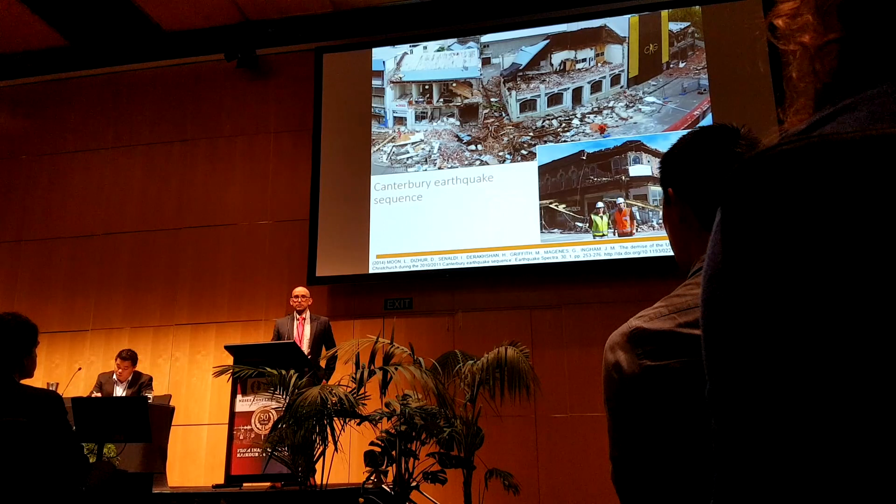My professional career took a completely different turn after the Canterbury earthquakes. This was one of the first flights after the airport reopened. I was in Christchurch for about a year, and along with Lisa Moon, we spent that time inspecting pretty much every single unreinforced masonry building in the Canterbury region—about 650 buildings in total. That data proved quite useful, ending up in Royal Commission publications, and we're still crunching through it.

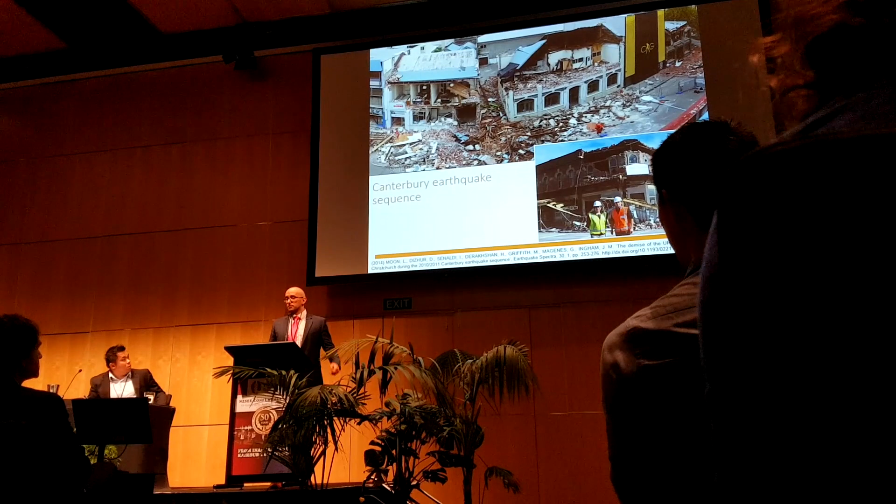Because I'll be flicking through the slides very quickly and mentioning things exceptionally fast, you'll see at the bottom of each slide a paper or report name that will refer you to more information. A lot of this has already been presented at different conferences and in papers, so this is essentially a summary put together into one presentation.

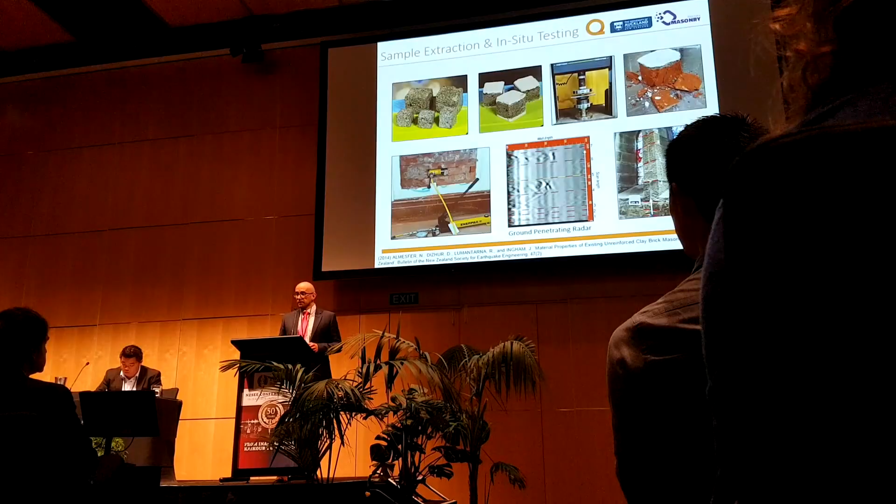We started the journey with small-scale things, looking at extraction of mortar samples to establish material properties for masonry buildings. Along with some peers at the university, we established a technique where we extract little samples from masonry buildings, compress them, and extrapolate to the global material properties of the building.

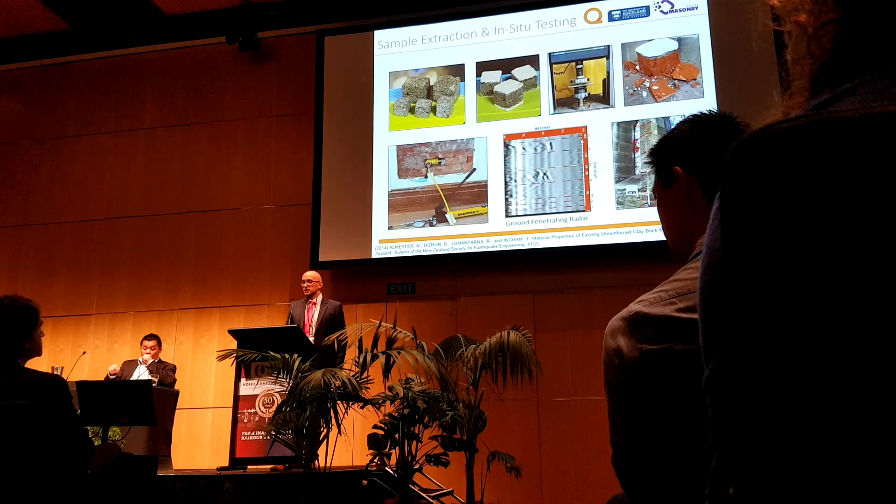We then modified various techniques from overseas to establish shear strength of buildings. We also used more advanced techniques, resorting to ground penetrating radar to establish voids within masonry buildings and interconnection, particularly for stone masonry buildings.

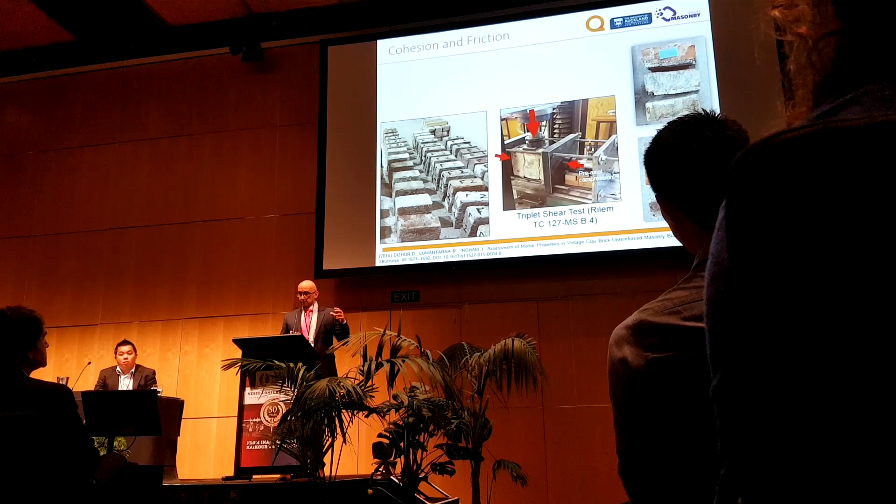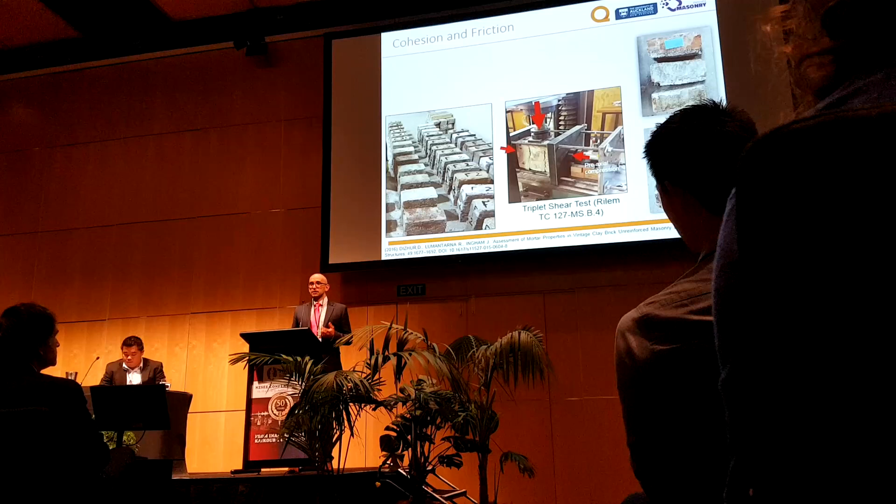We then moved to looking at assemblages, and established different coefficients of friction and cohesion for masonry with different mortar mixes and different aggregates for mortar mix. All of this ended up in the NZSEE section C8.

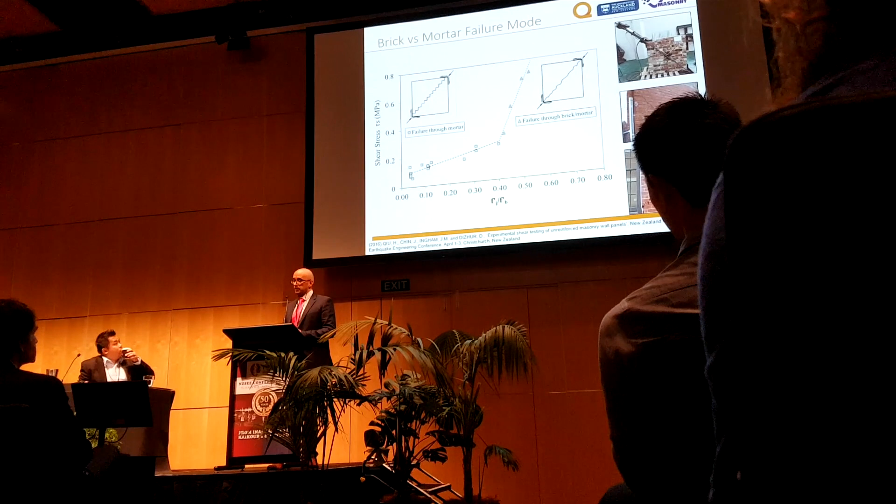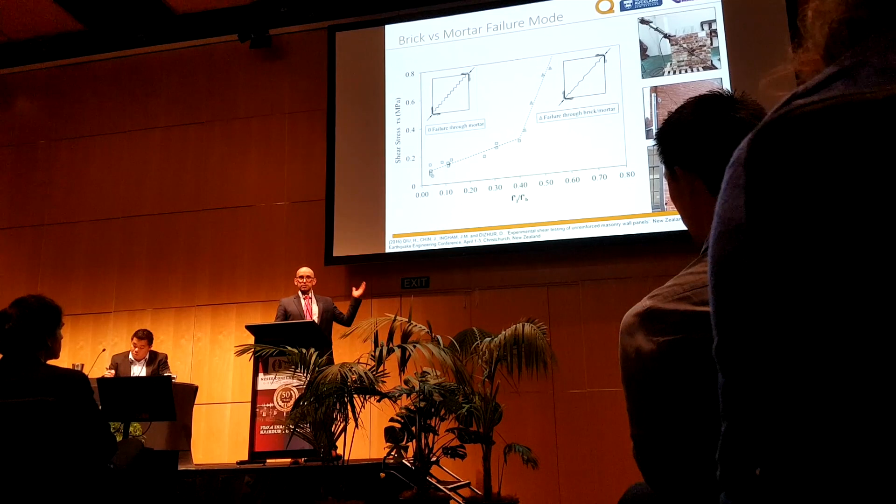What was done later was, again, one of the pioneering studies with material research: we looked at the transitioning point where the failure mode actually happens within the mortar joints, as seen in the picture on the left, versus a brittle failure that happens directly through the brick. We tested a number of relatively large walls using a variety of mortar mixes and brick strengths, and neatly established a transition point between the failure modes. That also ended up in the newly released section C8.

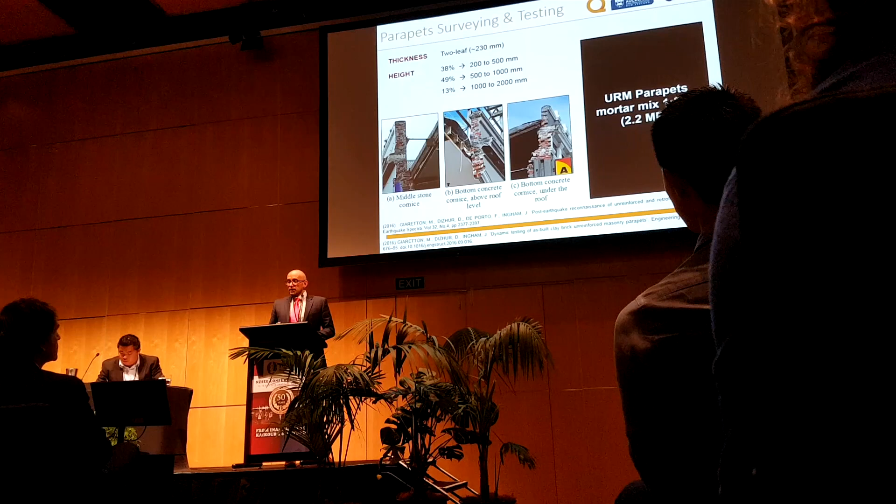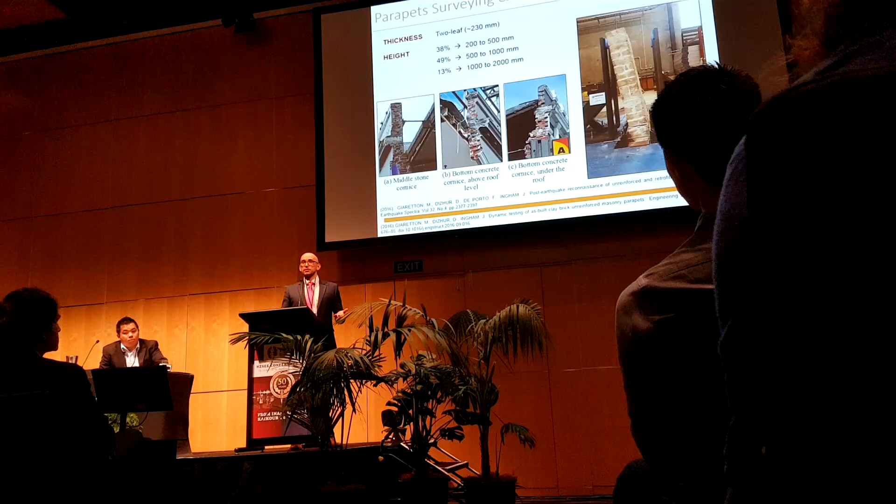Using data collected from the Canterbury earthquakes, we looked at all the parapets we could find—just under 1,000 of them. We surveyed them and established cross sections, heights, and failure modes, which guided us to conceive an experimental program: shake table testing of as-built parapets. The key takeaway was that you could use displacement-based assessment techniques, but a simple static analysis of the parapet also gives quite accurate results, which was a neat finding.

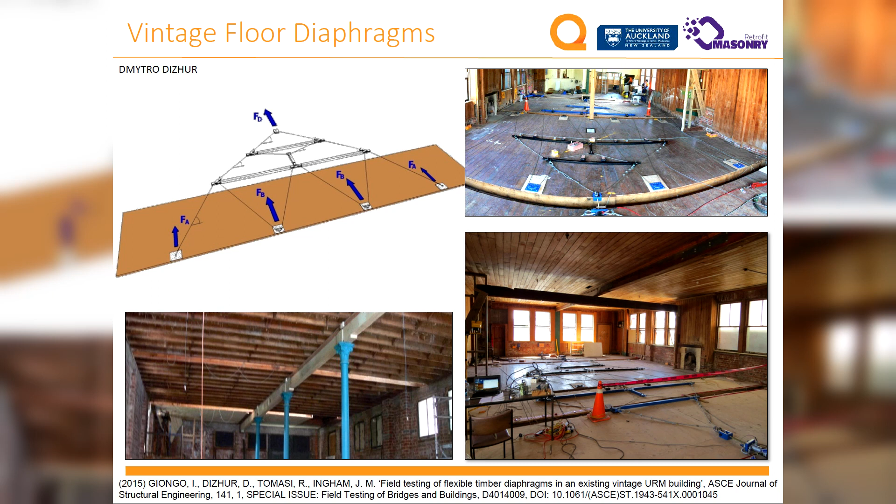We then decided to do something even cooler—I think this was actually the world's first test of a full-scale vintage diaphragm. We found a building in Wanganui where we developed a unique test setup, sliced and diced a diaphragm that was 100 years old, and pulled it to establish strength and stiffness. That fortunately fed directly into the NZSEE guidelines. That was my favorite, actually.

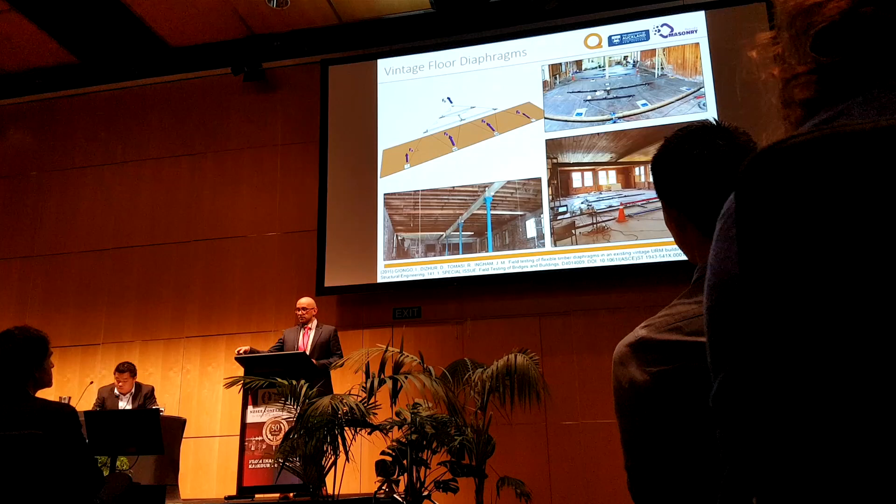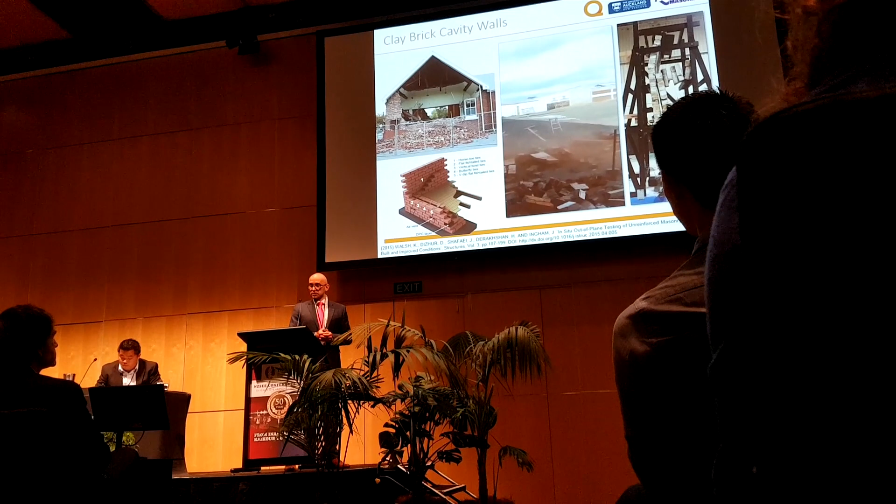The other vulnerable aspect of masonry is cavity wall construction, and one of the first things we saw in Christchurch was collapse of cavity walls. We again went back to the database collected from Canterbury and established different failure modes and geometrical configurations, and based on that, developed and conceived an experimental program.

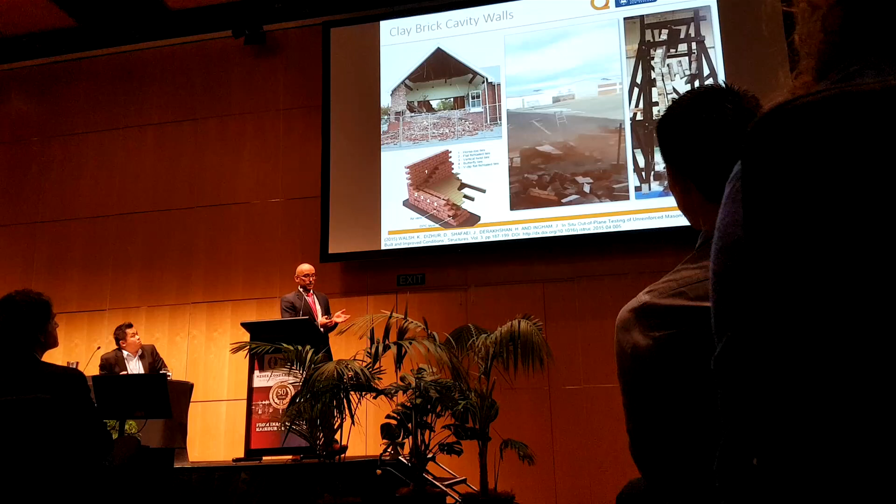One of the key takeaway points from here is that basically the cavity walls respond as single leaf walls and are quite vulnerable to failure, and I think we all kind of knew that.

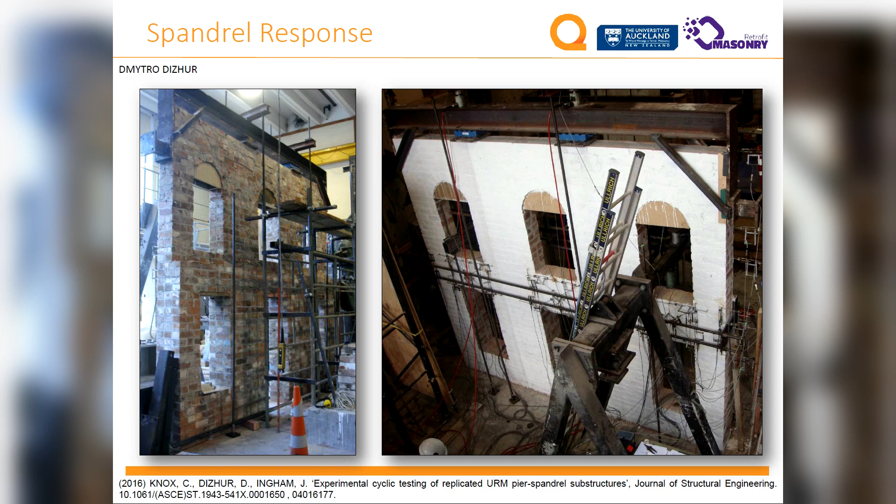This is some of the work that has been done by Charlotte Knox, looking at the in-plane failure modes of spandrels, but I'll skip to that really quickly.

Then we looked at more of a global performance of buildings. Up to now we looked at just assemblages and components, and I really wanted to look at the global performance. This particular study will be presented three presentations after me, so I don't want to steal the thunder from the presenters. So then we thought, well, how about we make it even more extreme?

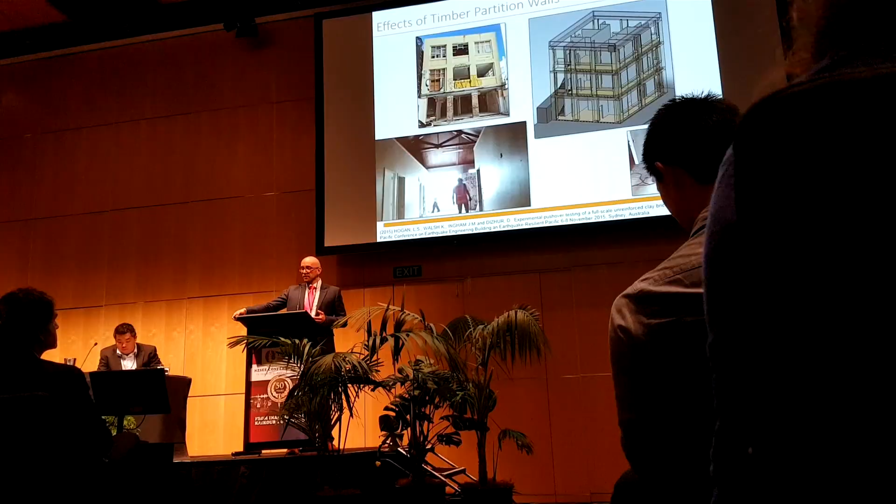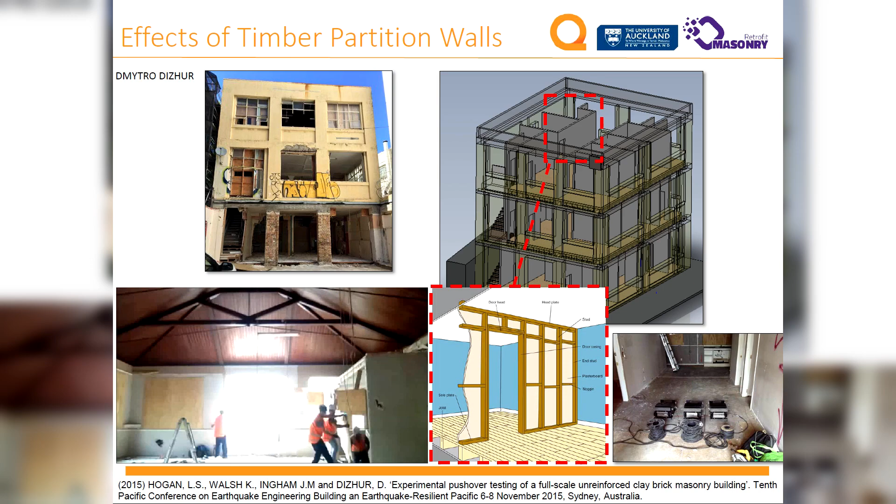We tested a full-scale building that was up for demolition over in Auckland, just around the corner here. What we've done is put little shake tables on the building, excited it, and determined the dynamic properties of the structure. We then removed the partition walls extremely quickly from different layers, different floors of the building, retested the building, and seen how the dynamic characteristics had changed.

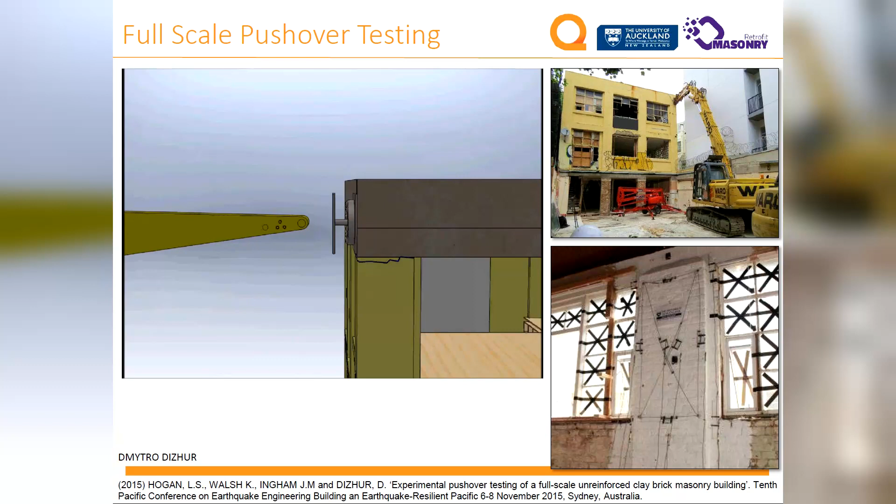But then that was not crazy enough, so we got into a bigger excavator and pushed the building across. We recorded the forces and the displacements, which we then used to compare to the results we would get using NZSEE assessment guidelines and ASCE, as well as different modeling techniques, and that aligned quite nicely.

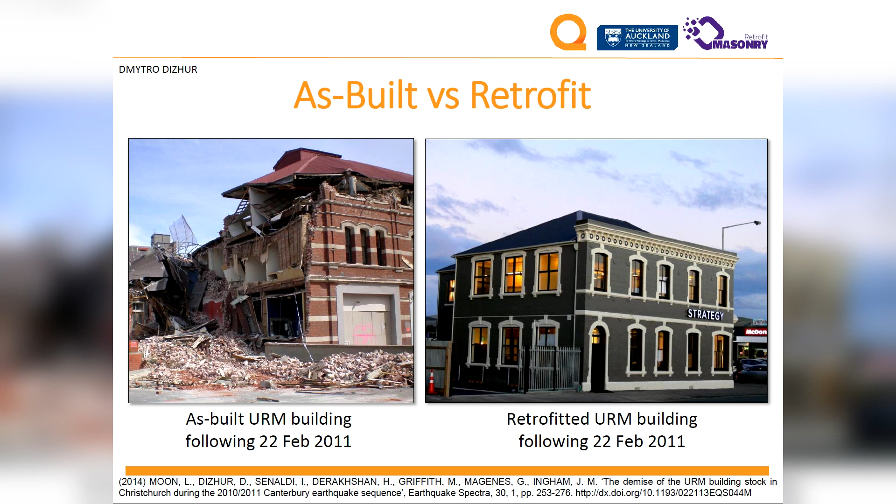So that brings me to more around the topics of retrofits, and we've seen quite a number of case studies in Christchurch where retrofitted buildings, unreinforced masonry buildings retrofitted before the earthquakes, performed extremely well. We wanted to dig deeper into that because it was quite a unique data set that not many other countries around the world have access to.

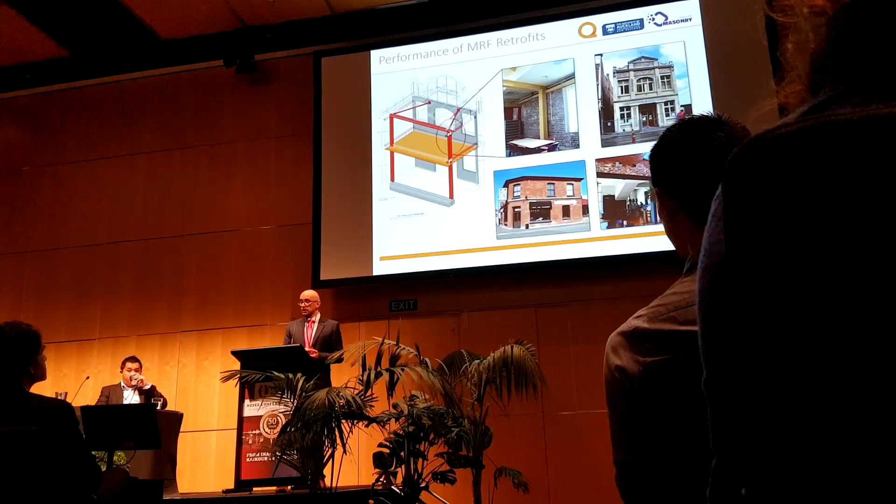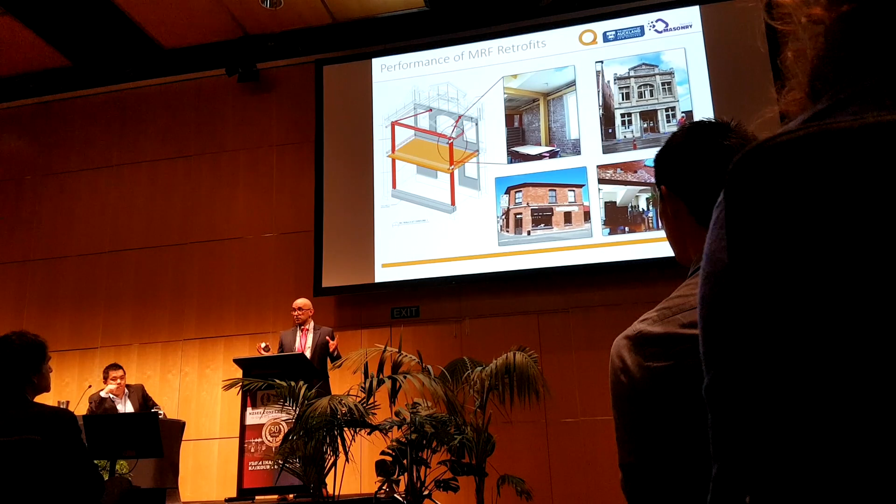The first thing we looked at is some of the buildings. There were seven case studies in total which had steel frame retrofits, some of them considered flexible steel frame retrofits. We've been looking into why some of these buildings performed extremely well, doing a sort of forensic study around this, and this is still underway.

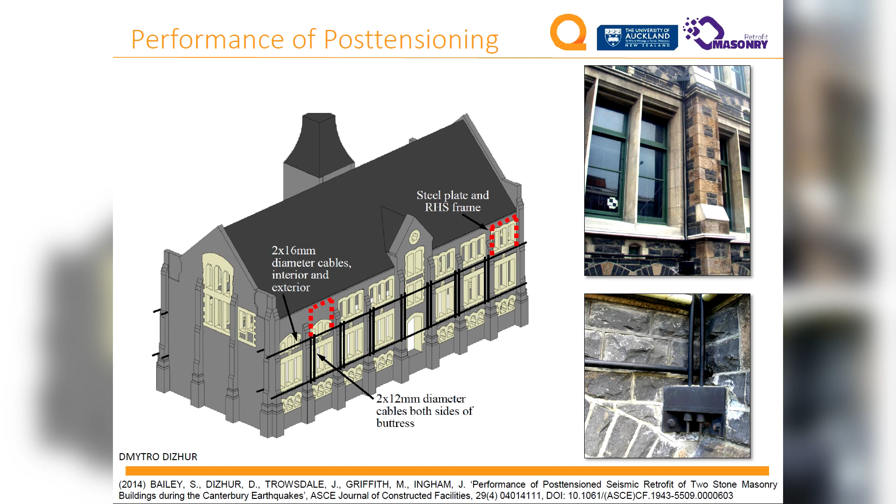We reported performance of this particular building. This is actually still in existence in Christchurch in the Arts Centre, and it's been reopened to the public just recently. It used vertical and horizontal post-tensioning, as you can see, externally positioned throughout the building - really cost effective, and from what we've seen, performed extremely well. So we were really interested in looking at this case study.

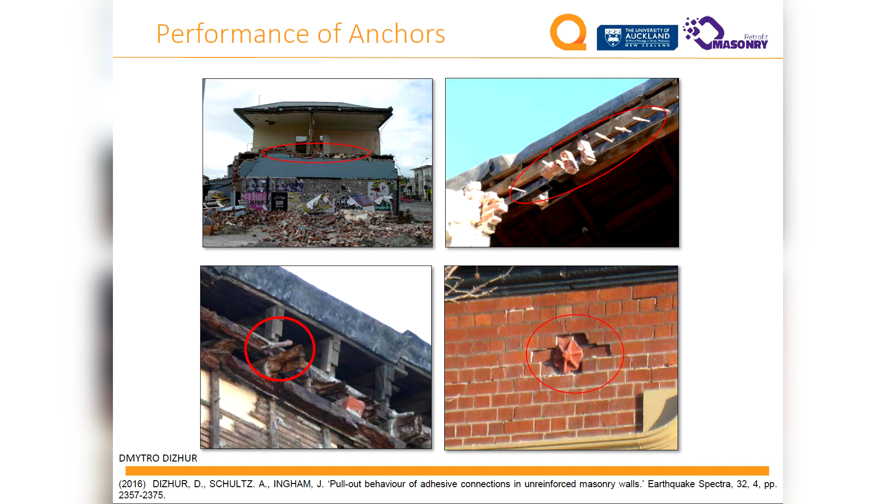There were a number of FRP building retrofits as well, which I want to mention here. Some things that haven't performed extremely well are the epoxy anchorages, and I think Jason mentioned this issue in his seminar. As a general statement, we found poor performance of adhesive anchors in about 50% of the cases we inspected. It's quite a frightening statistic, and a lot of that, from our observations, was due to poor construction and poor quality control on site, perhaps.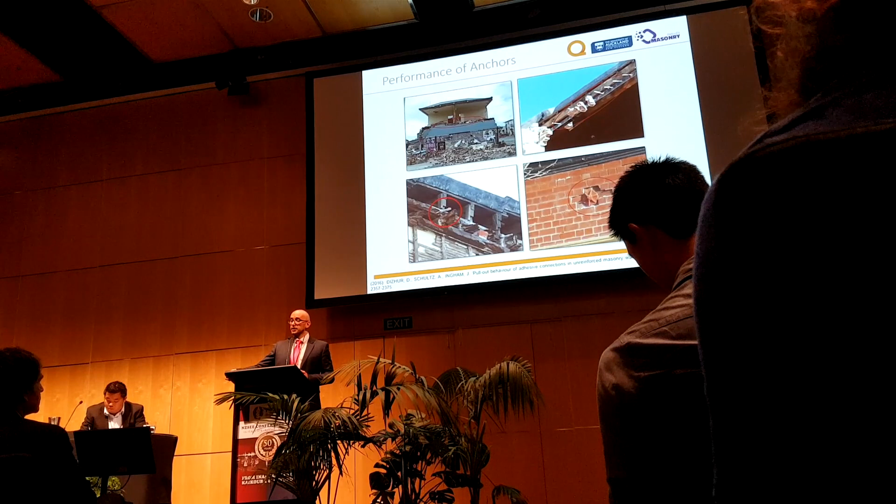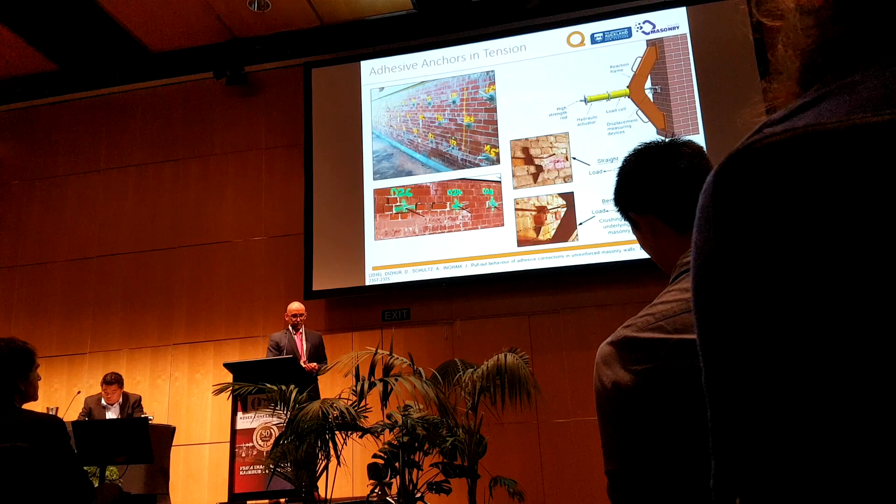We also looked at plate anchors. That got us thinking about doing a whole experimental program around epoxy adhesive installed anchors. So we went and found buildings around Christchurch, Auckland, and Wanganui, and we've tested something like 650 anchors with different configurations, different epoxies, and all that good stuff has ended up in section C8 as well.

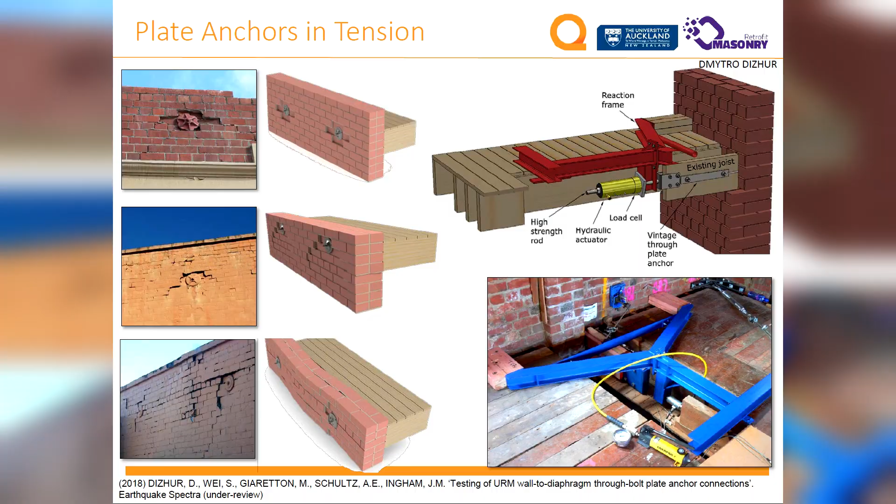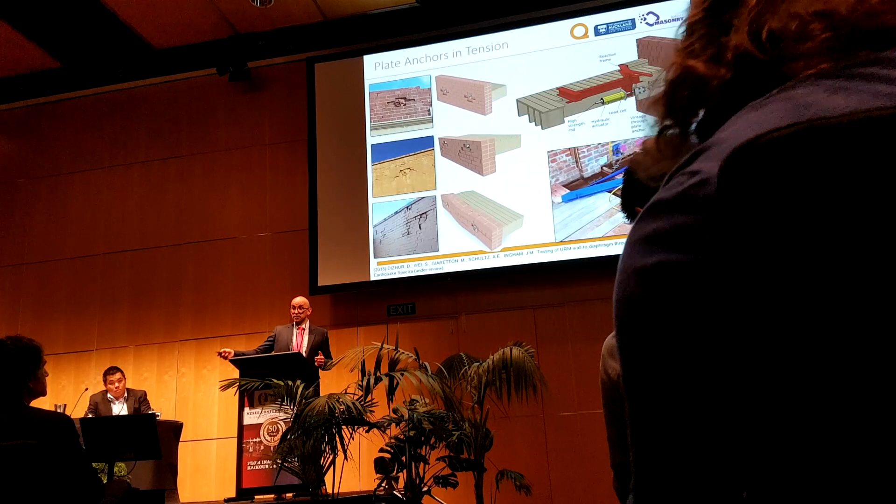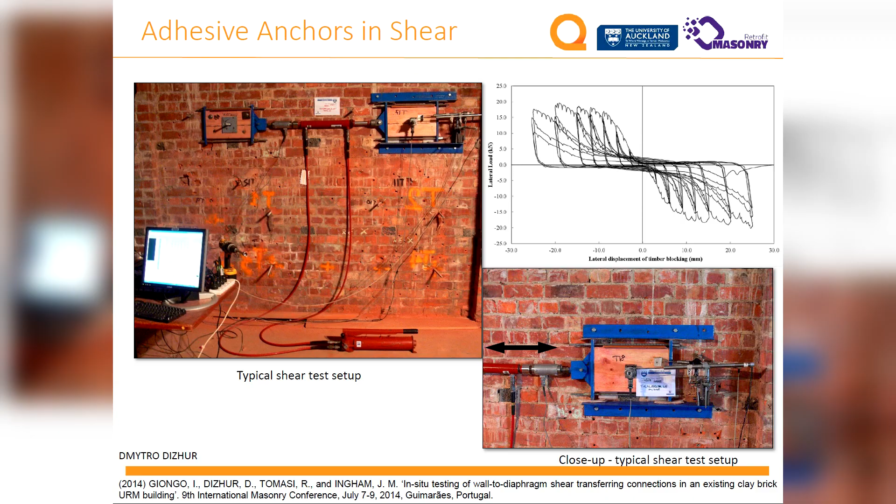A similar exercise has been repeated with plate anchors, where we tested existing plate anchors that were almost 100 years old, and then tested new plate anchors as well - some of that stuff again ended up in the NZSEE guidelines. This is probably another world's first, where we found anchors don't always act just in pure tension. When we load anchors in shear, we need to know what the capacities are. So we ran an experimental program with quite a few dozen different configurations of anchors, tested them in various cycles, and once again that was fed directly into the NZSEE guidelines for assessment.

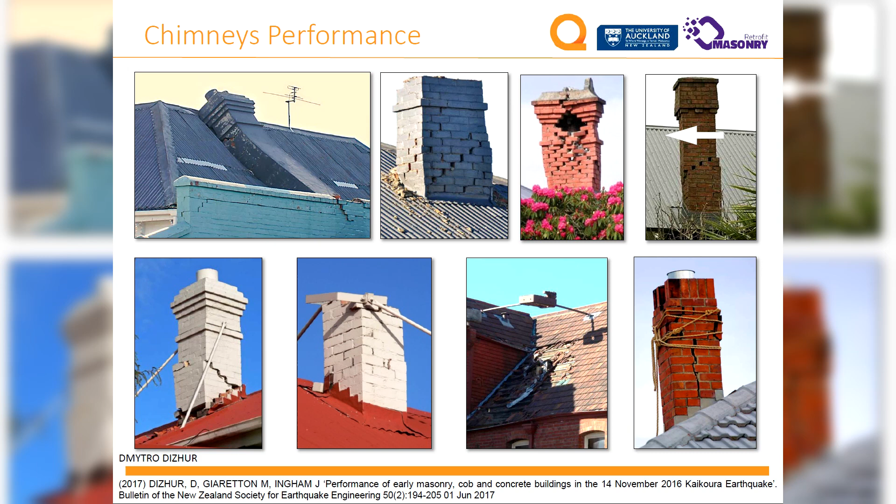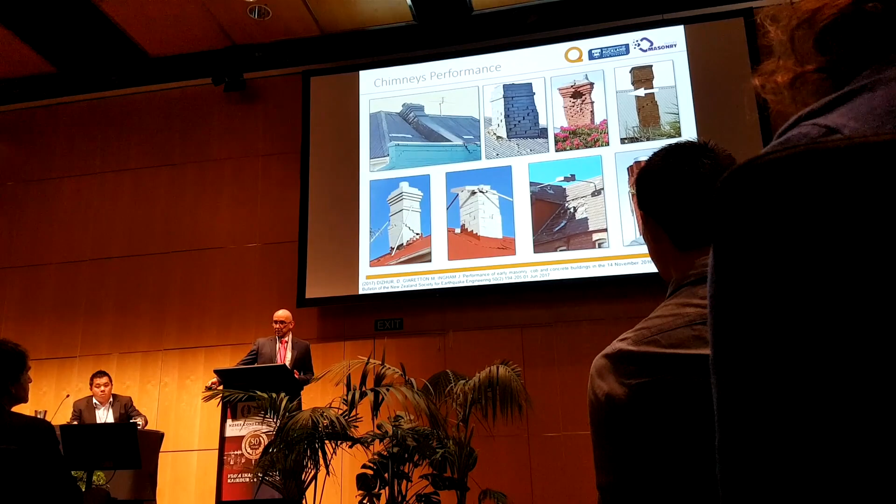One of the first things anyone sees following an earthquake is the collapse of chimneys. We also looked at chimneys that were retrofitted or braced, and those haven't really performed adequately as the designer potentially expected. So we started a small experimental program looking at the performance of the as-built chimney, the one shaking around there, with very weak lime-based mortars.

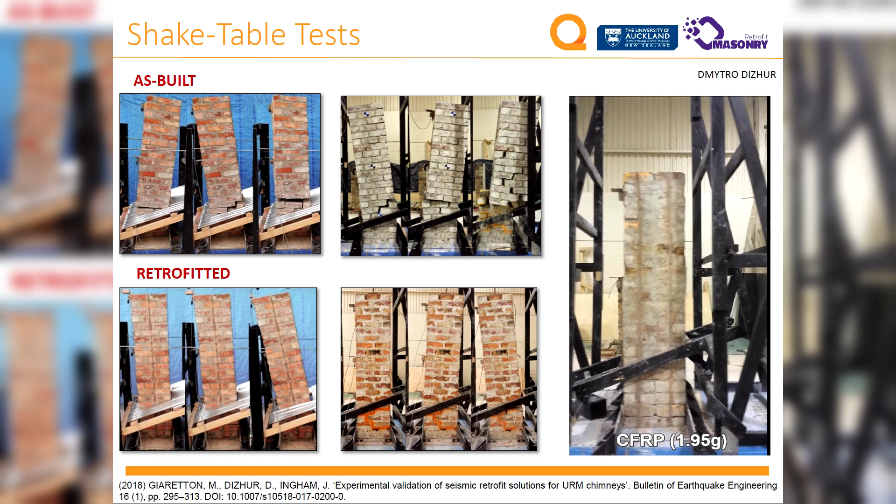We then looked at creating retrofit techniques. One of the first we tried was using FRP strips positioned vertically within the masonry, extending down just below the flashing level, and that performed considerably better.

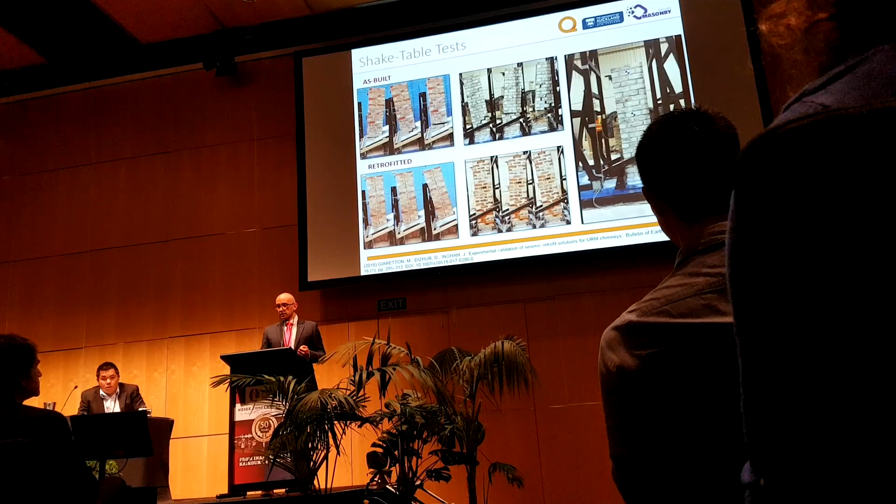What we did later was position a vertical threaded rod right in the middle of the chimney and essentially clamped it top and bottom, testing with different axial loads. Even with an axial load that was just hand tightened, we still managed to considerably improve the performance.

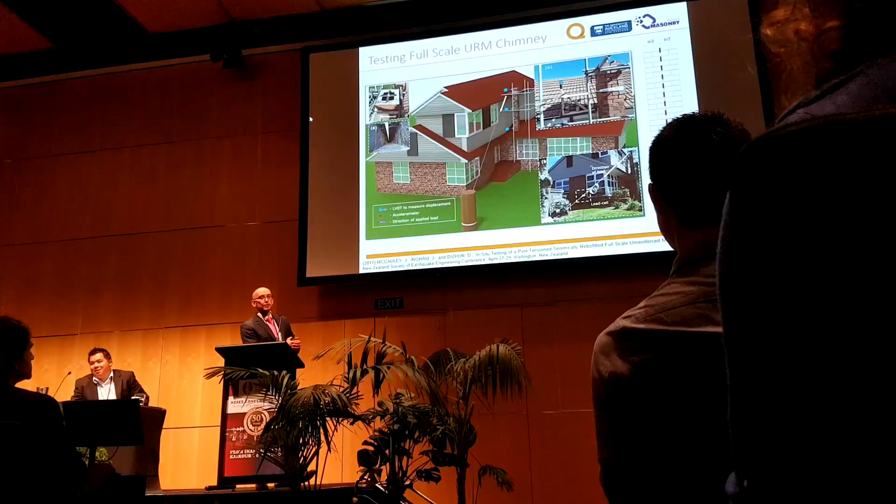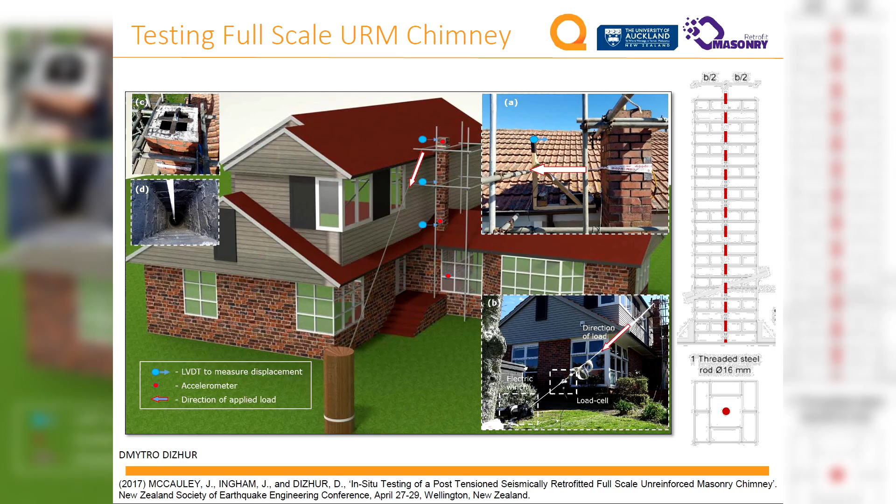So we tested the chimney using a very innovative pulling system, in the as-built condition, and then through the scaffolding we lowered a threaded rod all the way down to the bottom of the chimney, clamped the whole thing together, and retested it. The takeaway point from this experiment was that we had a very earthquake-prone chimney, and by doing a retrofit that took less than an hour, we took it up to 67% NBS or above.

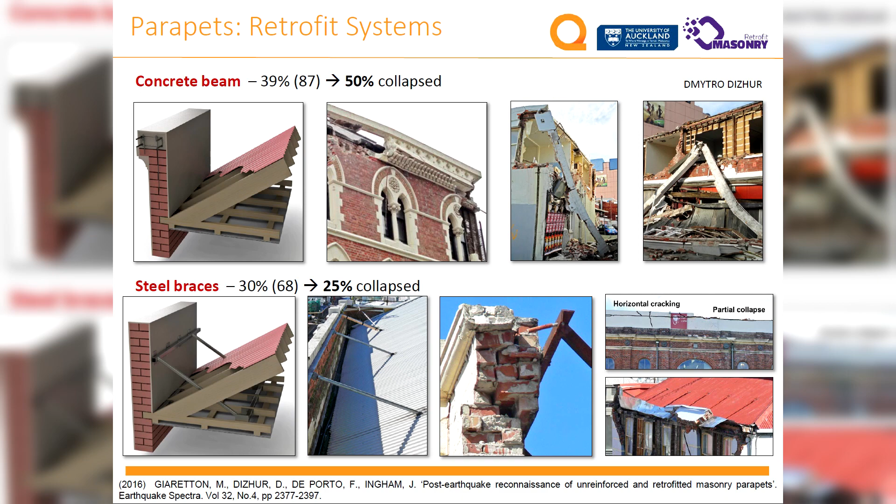We looked at different restraints, parapet restraints, especially their performance following the Canterbury earthquakes, and that got us into developing and conceiving an experimental program where we tested different bracing systems.

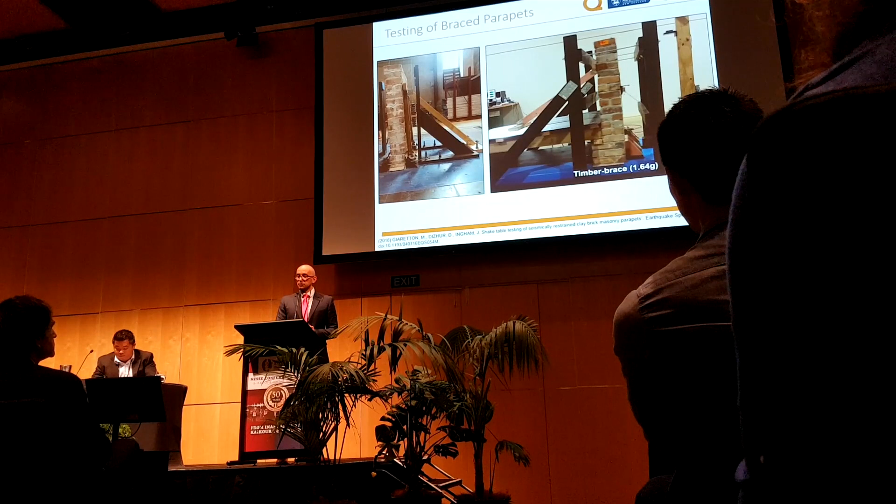I'll run these both simultaneously just because we're running out of time. The whole point here is you can see the accelerations are actually quite large, and the subsequent step of this study is to develop a number of standardized solutions that engineers could potentially use.

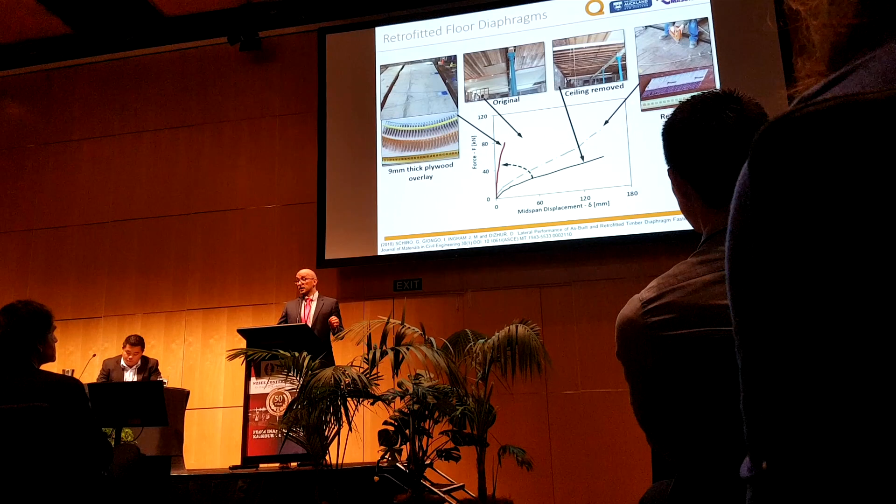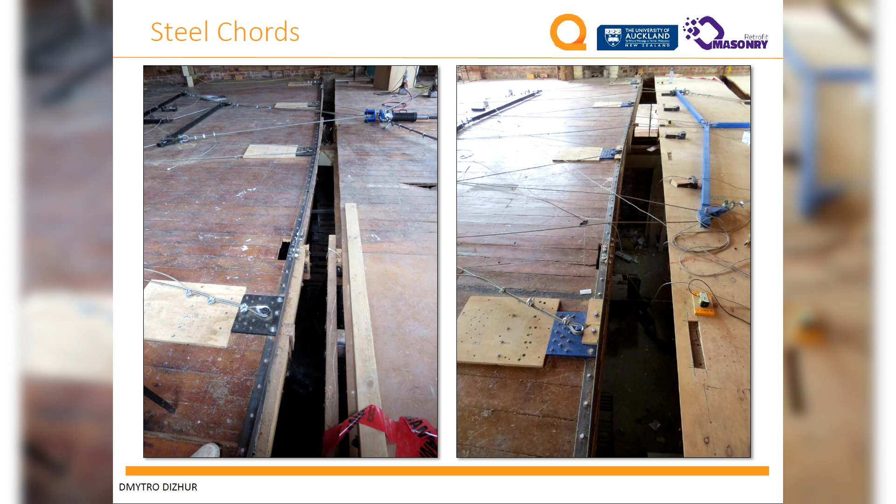We'll flick through this very quickly, but we looked at diaphragm strengthening. One technique is using very thin plywood overlays, or simply renailing the diaphragm, which each have their own benefits and disadvantages. We then looked at the installation of perimeter chords.

Diaphragms act as shear beams and not flexural beams, so perimeter chords did not really influence the performance as much as we wanted.

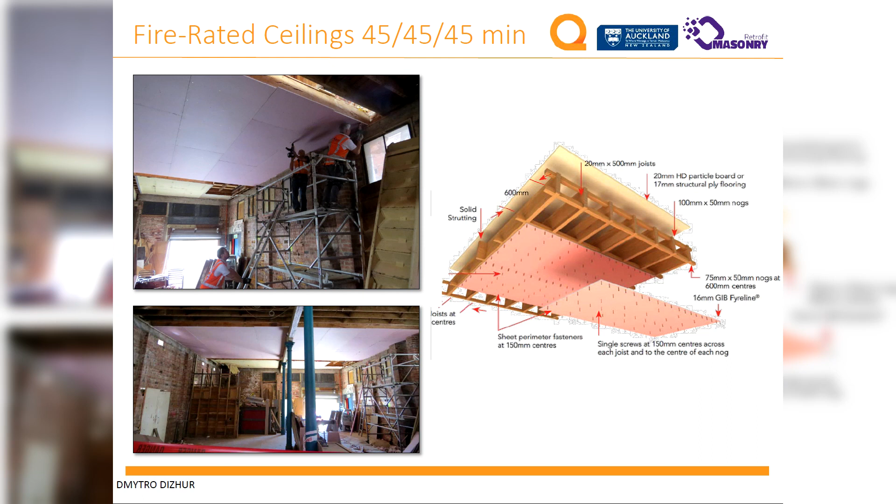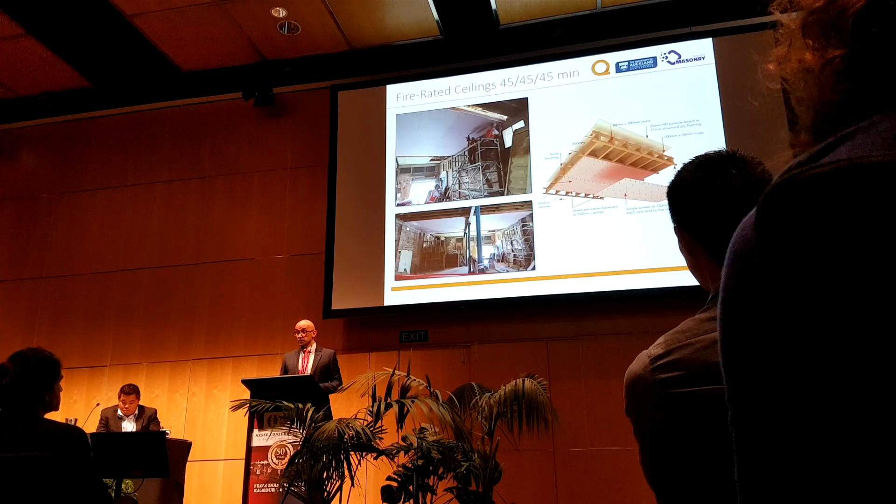We also looked at using fire-rated ceilings, since as part of upgrades, some older buildings require fire systems to be upgraded. So we used fire-rated ceilings and subjected the diaphragm to lateral loads. That didn't work as well as one might hope, because after certain periods and amounts of drift, the sheets delaminated and actually came down from the ceiling.

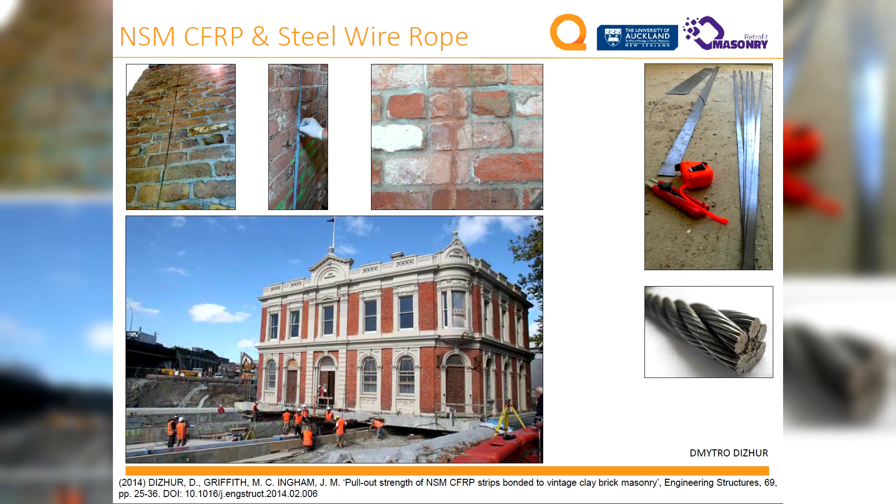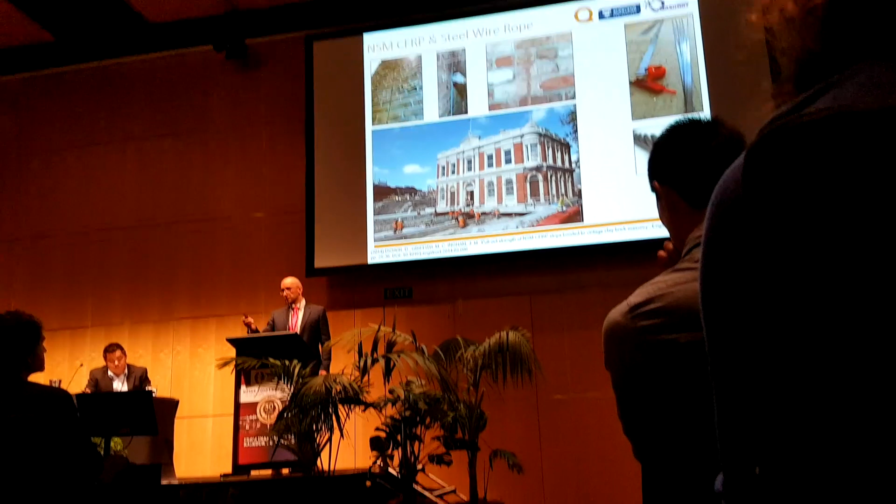We looked at a number of retrofit techniques for strengthening walls, in plane and out of plane. This is an example using near-surface-mounted small carbon strips embedded into masonry, and more recently we've used steel wire rope positioned in the same manner. We've now implemented this technique in at least a dozen buildings around New Zealand. Some of you might have seen this in the SESOC presentation and the SESOC journal.

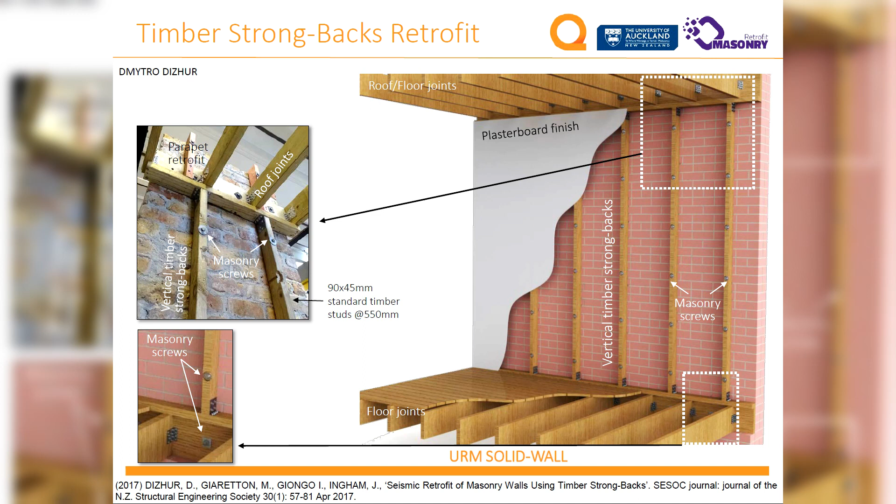We developed a technique using simple timber framing, vertically positioned 90 by 45 timber studs from Bunnings, connected top and bottom with specially designed screws, regularly positioned. That has extremely well improved the capacity of the walls in the out-of-plane direction.

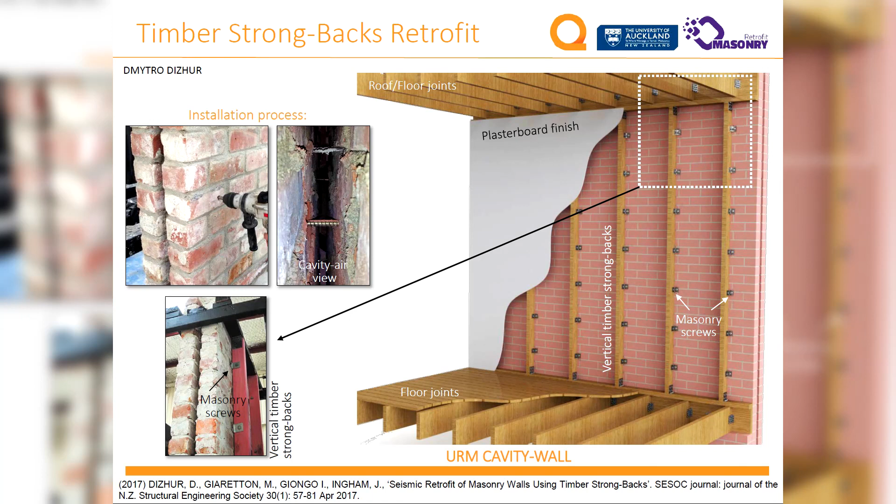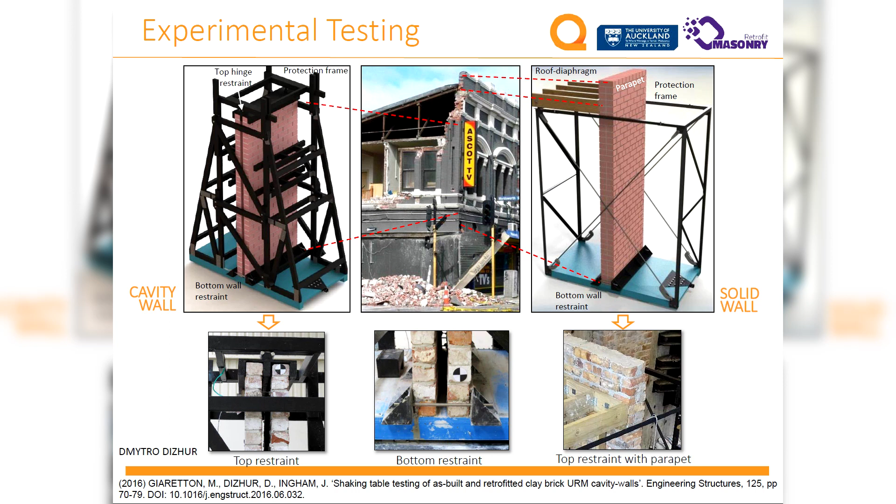We then developed - I've got two minutes to go through another slide - a similar technique for cavity walls. We then put all of this on the shake table at full scale to make sure we validated it and the technique actually worked.

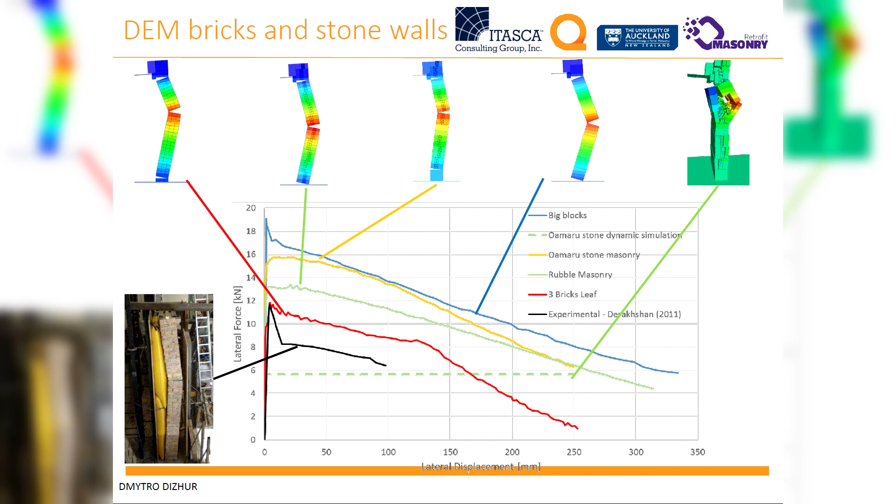Up to this slide, everything we've done is something you can possibly use after lunch and start implementing in your project, so quite practically orientated. The next couple of slides I want to quickly skim through some of the more future research that will, in the future, potentially end up in some sort of practice.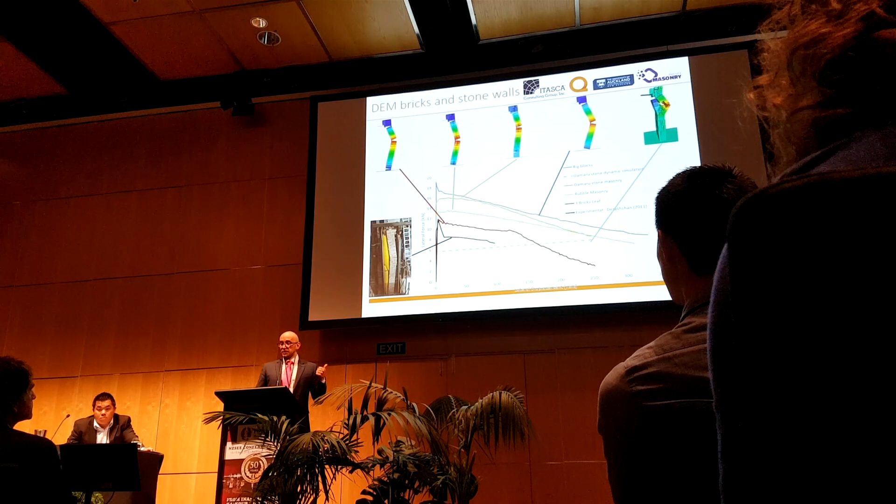We've done discrete element modeling, which models individual bricks and mortar, and we calibrated this model in the out-of-plane direction using simple pushover tests, relating that back to some of the airbag testing we've done at the university.

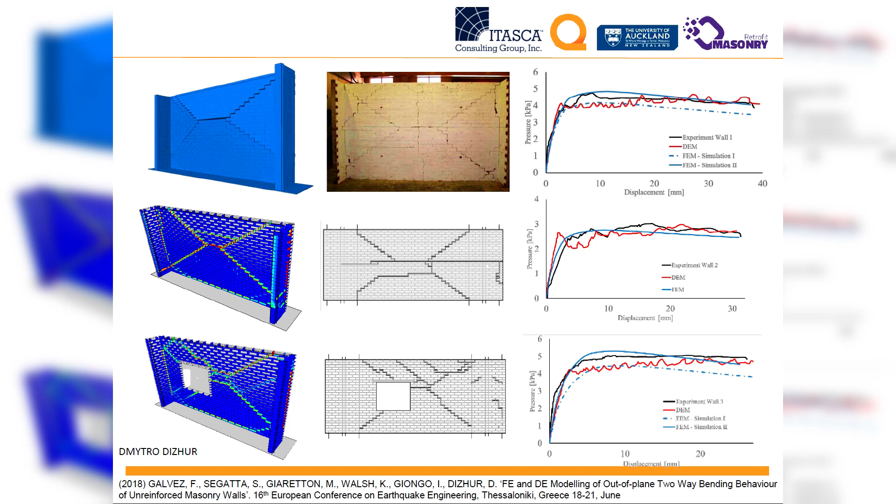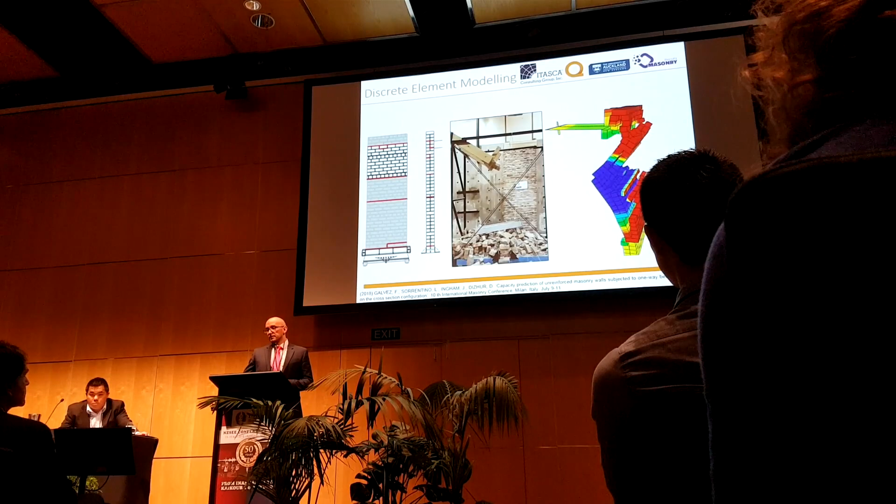We then further calibrated the discrete element models using two-way bending experimental results, and you can see how that was quite nicely correlated. We took it a step further and used shake table data to further validate these discrete element models, and then used the global building we'll see in a couple of presentations to also calibrate this model.

But all this is good, it takes quite a few hours to run because our computing is not yet ready for such modeling from a practice perspective.

So we used something that's been quite popular and hitting the news lines recently, the use of drones. Drones are actually quite cool because we can collect huge amounts of information really quickly and really cheaply.

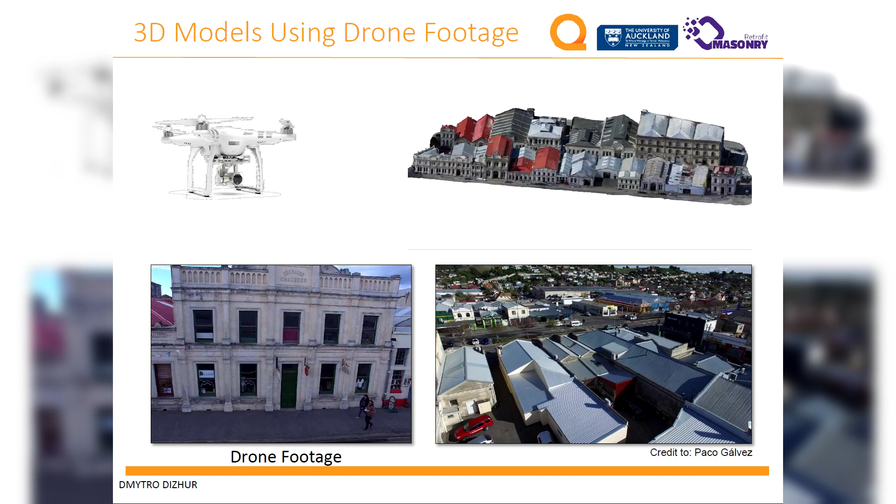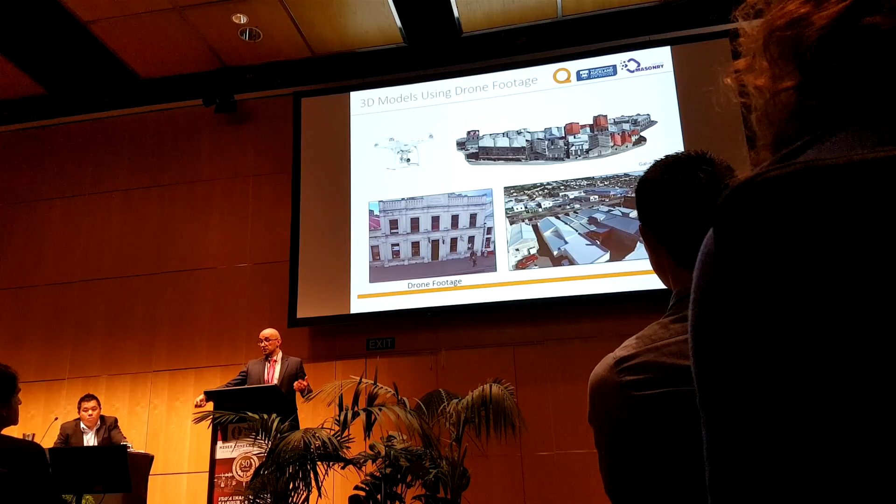This is a model of Oamaru, a three-dimensional mesh of the building structures, collected in a matter of minutes. We've done that for Oamaru and other parts of New Zealand as well.

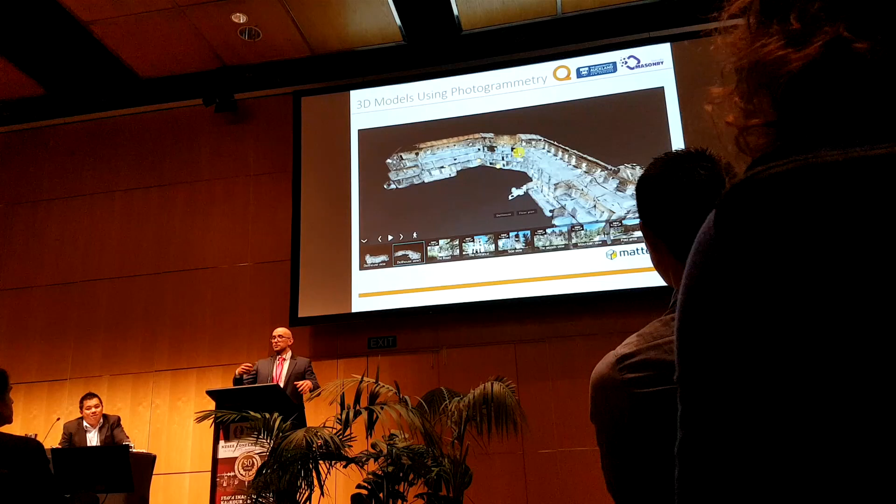You can use photogrammetry to build interior models of buildings as well, and I think some of you might have seen this before. Just one minute—hopefully you're finding this interesting so I'm not just stealing your time.

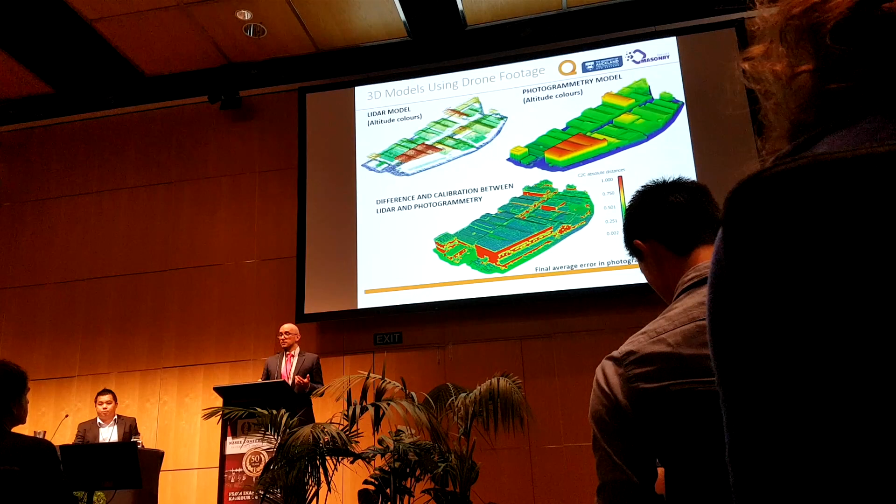We then used LiDAR scanning data, which is actually publicly available in this example from Otago Council. We used this data to calibrate our photogrammetry models and found an average difference of about 100 millimeters. I think this is quite good considering how little time it takes to accumulate that large amount of information for building communities.

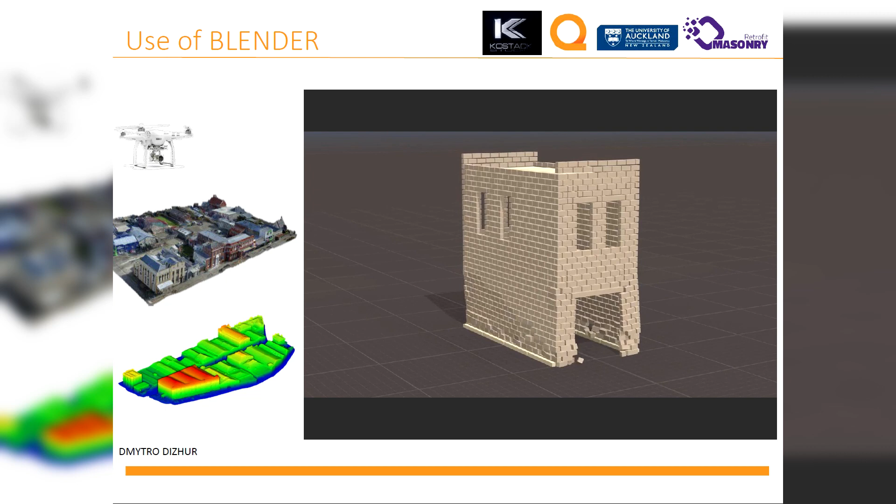The ultimate goal is to model, in real life, the performance of building communities. Using the discrete element models I've shown you before isn't feasible because of the computing time, so we resorted to something called Blender, used for special graphics and gaming, but it has physics embedded into the coding.

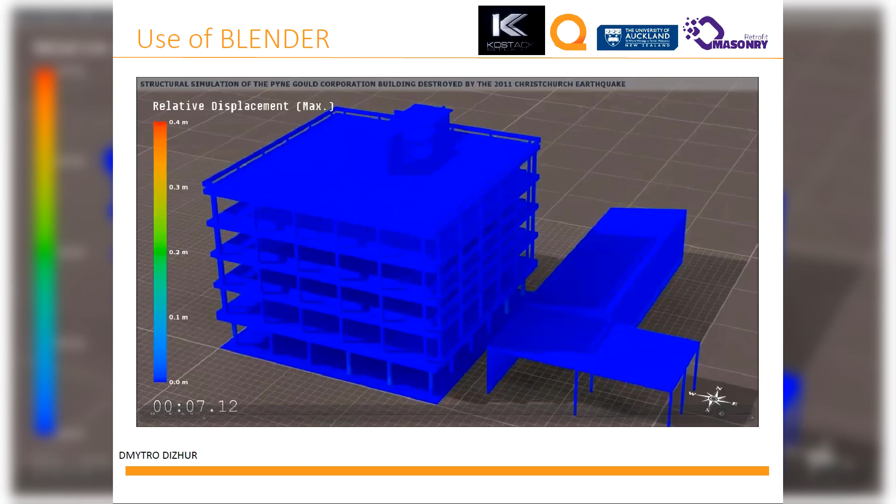You can see it still needs some work, but this considerably decreases the running time, and we can do quite a lot of cool things really quickly. I'll skip through this—this is another very cool thing you can do with Blender.

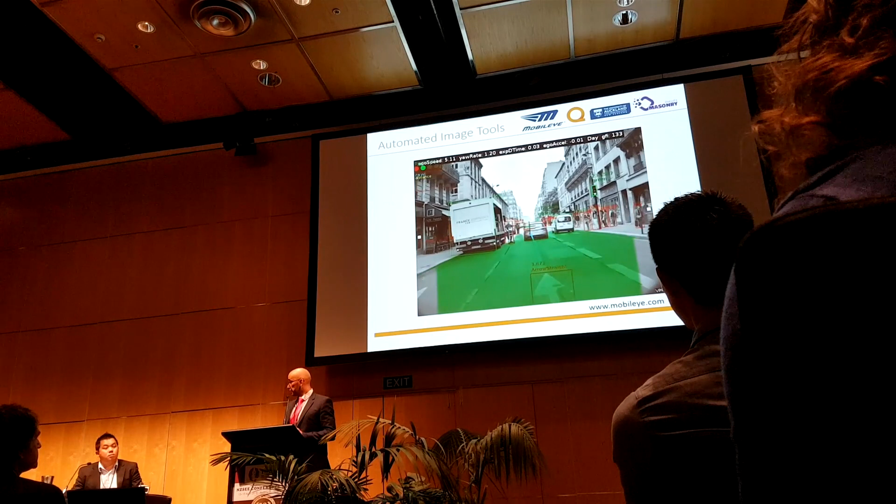This is in real life—it picks up the pedestrians, the road signs, the color of traffic lights, etc. It does take considerable effort to train an algorithm like this, but once you do, it's quite amazing what you can do.

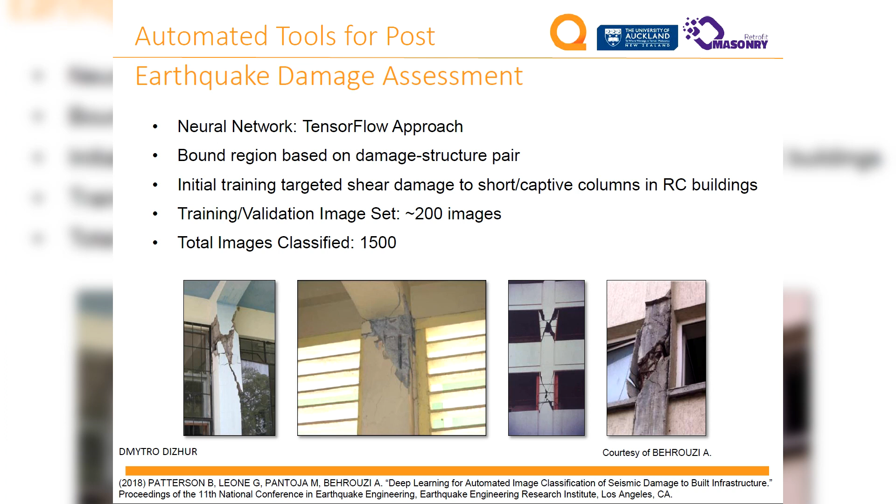So what we've looked at is utilizing this for earthquake engineering and damage identification. In conjunction with University Cal Poly in California, we've been studying training algorithms for damage detection—it's like Facebook for buildings, if you like. It identifies certain damage depending on how you train it.

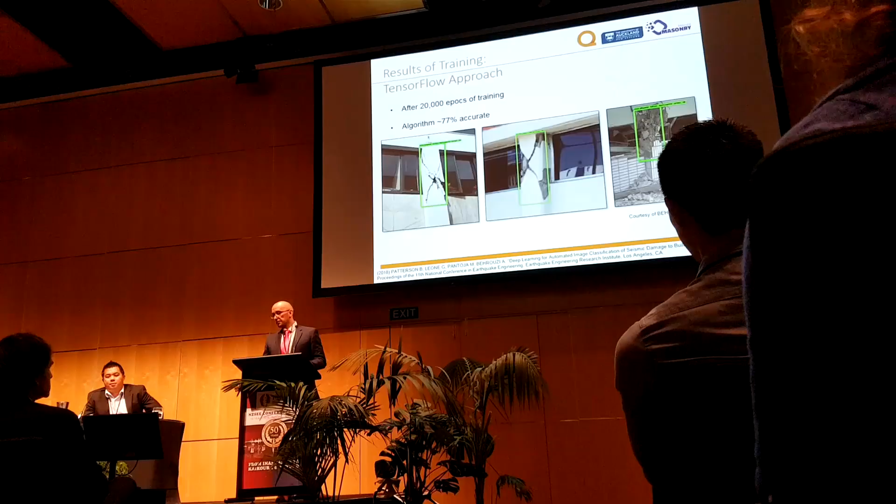So you can see how I transitioned from crushing mortars all the way down to using artificial intelligence.

Before Cam kicks me off the stage, I want to leave you with this phrase, borrowed from John F. Kennedy—we would like to have input from the community and from industry to help us drive the future of research. So thank you very much.